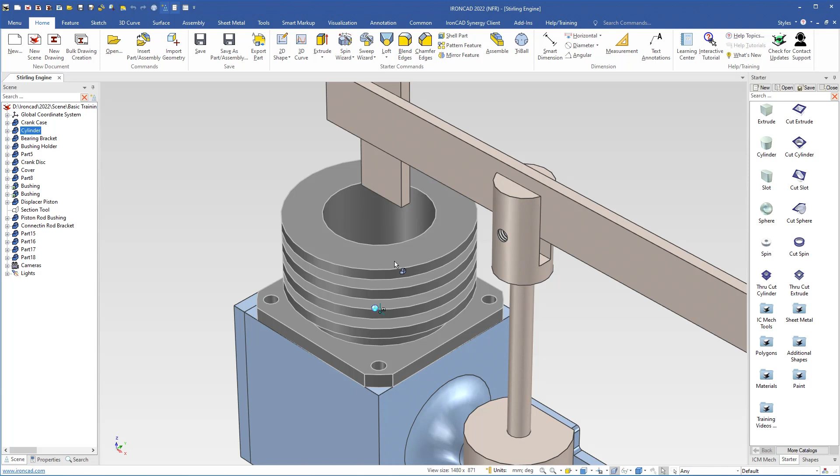We are going to make a piston that will fit inside this cylinder. I will select the cylinder, then hide the other part using Ctrl Alt Space, hide unselected. To make the cylinder, we will use the cylinder from the starter catalog. I will right drag the cylinder and drop it here on the center point, drop as part, and we get a question asking if we want a cylinder on every linked feature.

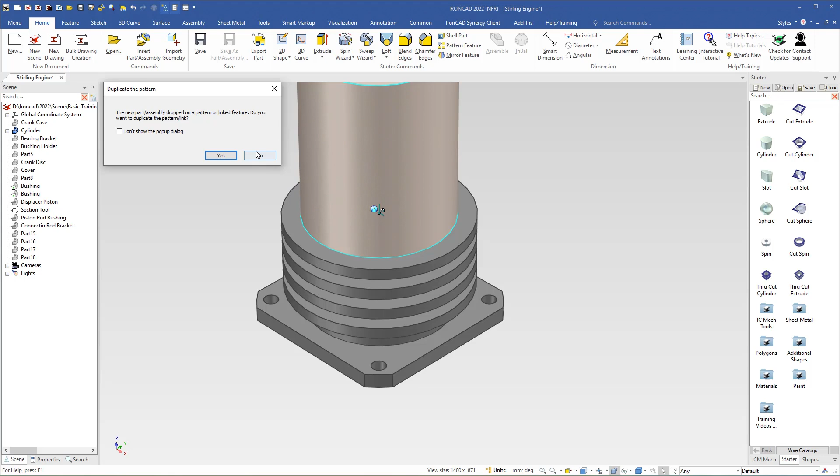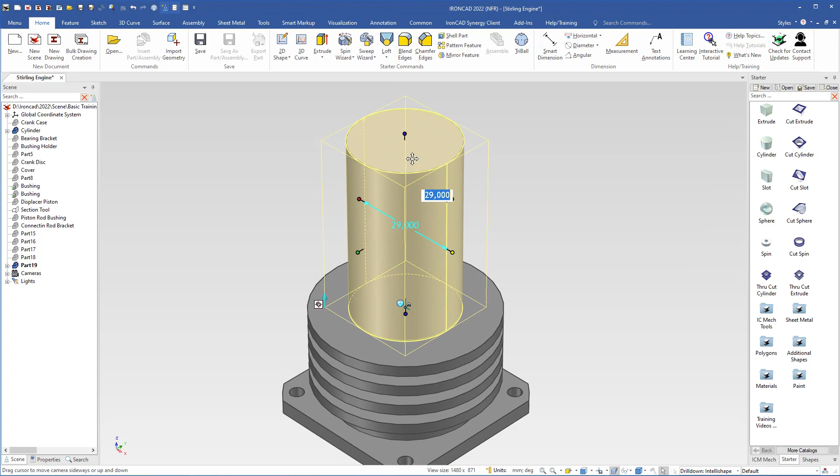No, I click no here, and then I will change the diameter. I will grab this handle, make it smaller so we can see the hole in the cylinder, then left click and hold this handle, move the cursor to this edge, press and hold shift to snap to this edge so we get the right diameter. I will grab this handle, push a bit, let go and type 22.

Then we place it inside the cylinder, so I will right click on the IntelliShape and choose Flip Extrude Direction.

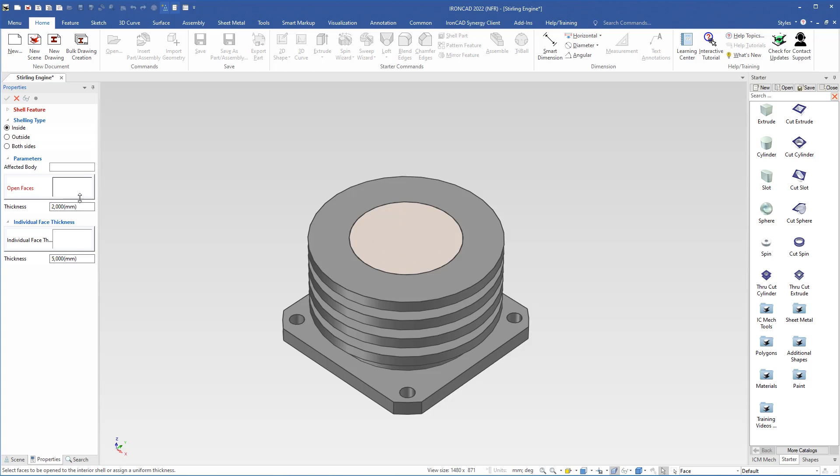Then we will make this piston hollow using the shell part command. We come over to the properties, use inside, and open faces will be that face, and the thickness will be 2 millimeters.

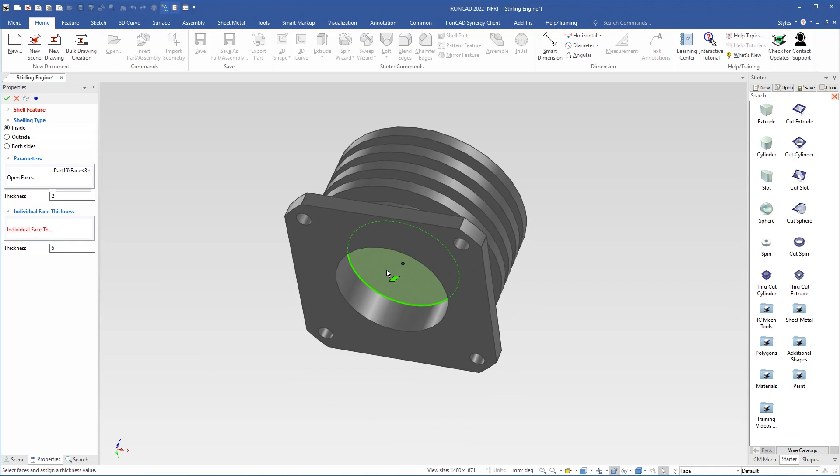Then the bottom will have a different thickness, so I click this box so the text becomes red, indicating it's active, and the thickness of the bottom will be 5 millimeters. I move the camera to this position and select the bottom, then right click in the scene and click OK, and we have cut a hole here inside the piston.

And we need a joint bracket here inside the piston, because eventually the connecting rod will be attached or connected to this bracket. So I will use a cylinder again.

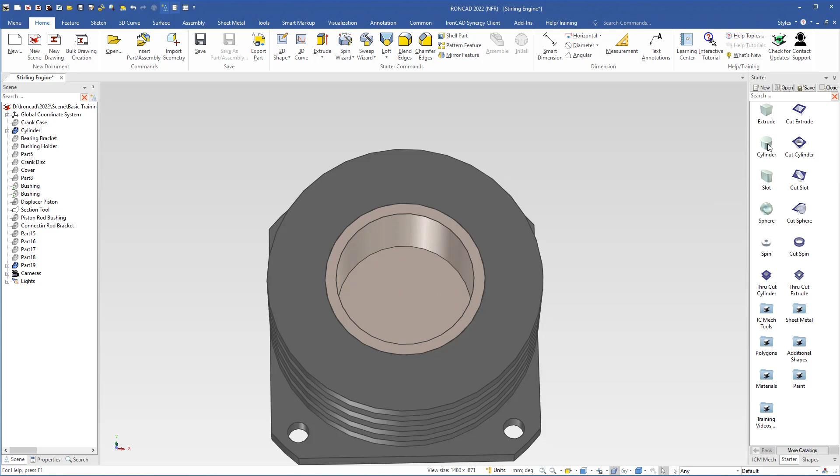I will right drag a cylinder, drop it here in the center, drop as part, and change the diameter to 10, and the height will be 15.

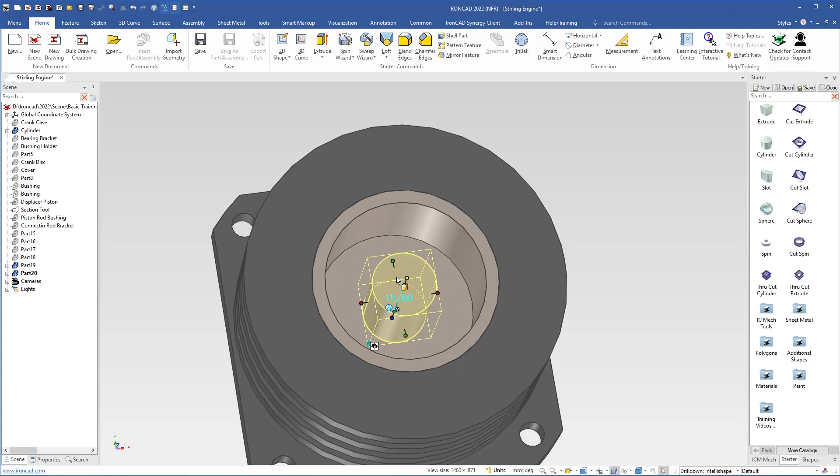Then we have to remove some material so the connecting rod can be mounted to the bracket, so we will cut a notch here. But to know which side to cut that notch, we must bring back all the other parts, so I will use Shift Space to show all, and now we see that it is on this side that we will cut a notch.

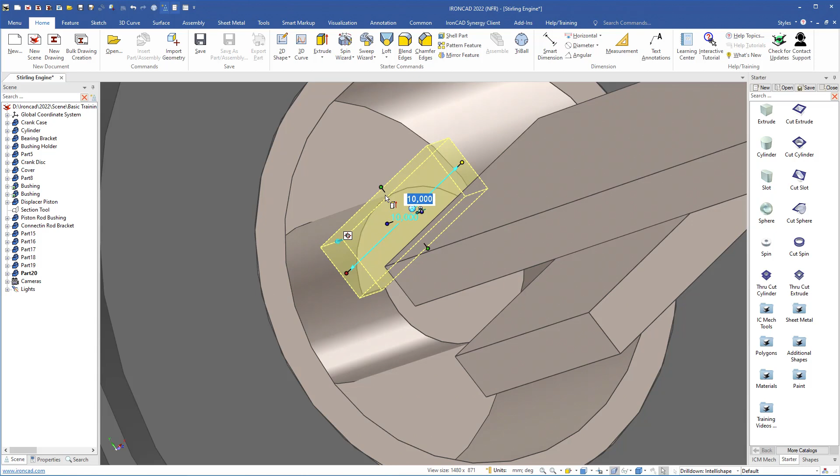So I will use Cut Extrude, drop it here, and grab this handle, use the shift key and snap to that node, and do the same on this side, snap to that node, and also here, snap to that node, and the depth will be 10.5 millimeters.

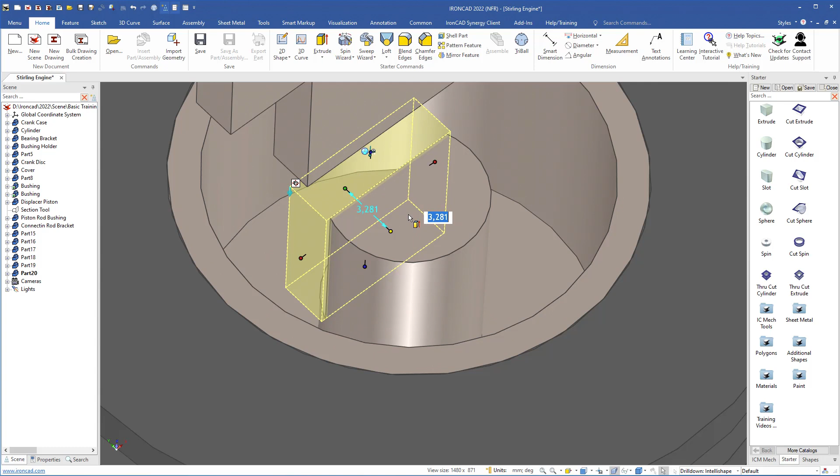Then I grab this handle and use the shift key to snap to this side of the connecting rod, and I will drop it there. But I'm sure we have to make some adjustments to that notch so the connecting rod will fit to the bracket, but we will leave it like this for now.

Then we will do some more adjustments to the bracket, so I will select the bracket and hide the unselected part using Ctrl Alt Space, and we will cut a hole or add a threaded hole here.

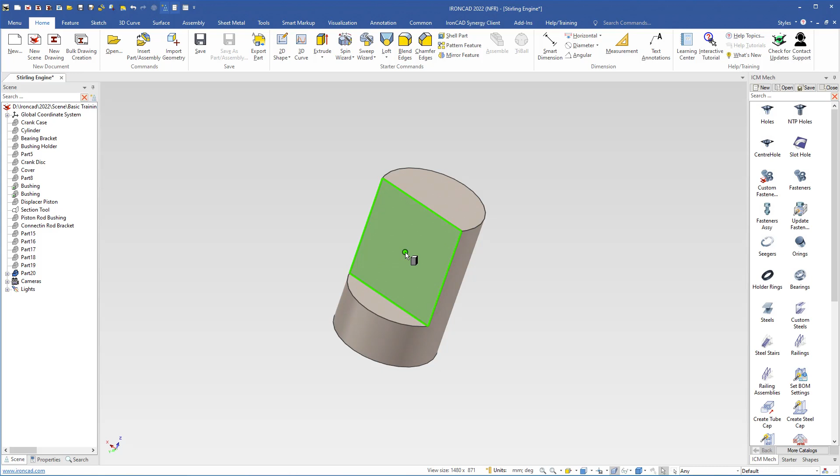So I will come over to the ICM Mech catalog and drag a hole, drop it here in the center, and it will be 4 millimeters, and it will go through. I will make sure it goes through, yes, then click OK, and the hole will be placed 10 millimeters from the bottom.

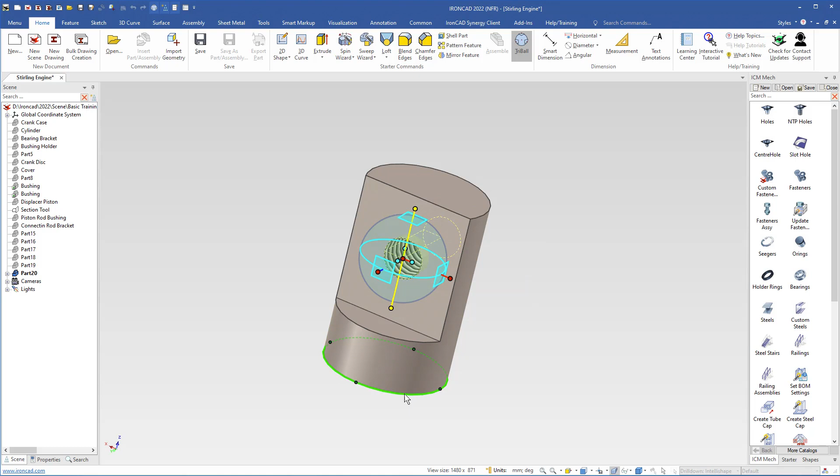So I will right click this handle, edit distance from point, this edge, 10 millimeters. Then I remove the TriBall, and we will also blend this edge.

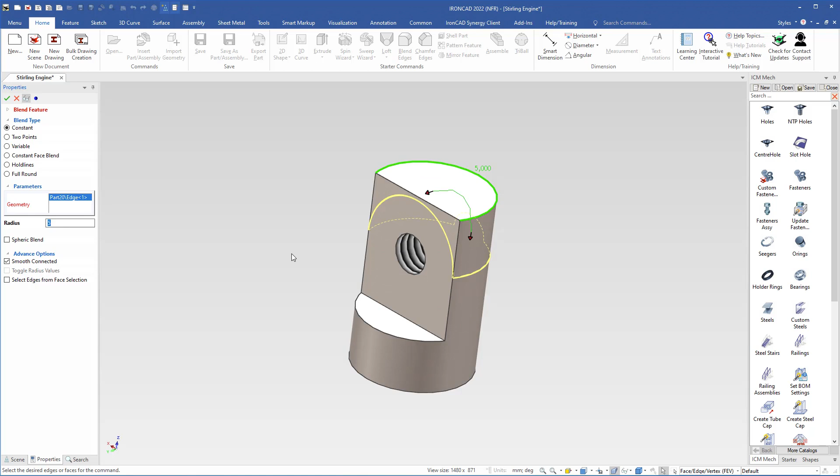So I will select the part at part level and use the S key and choose blend, and I will select that edge, and the radius will be 5 millimeters. Type 5 and hit enter once, then hit enter again to confirm the command.

Now we can bring back all the other parts by pressing Shift Space. Then I will move the camera to top front right and fit scene, and then we will save this scene and continue in the next video.